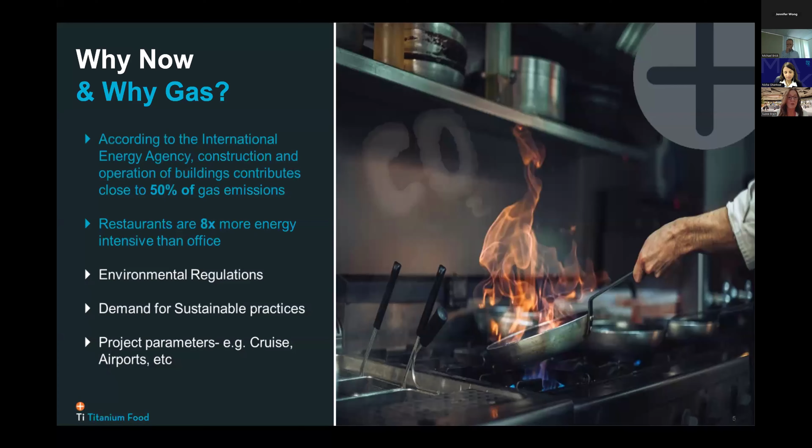But is it a good thing to say goodbye to gas? Well, a typical cafe that moves from being a mix of gas and electric to going all electric, your contribution to the planet is going to be equal to taking about 2 cars per cafe off the road per year. But beyond that, there's also a whole host of other benefits, both for you and the planet, your consumers and the staff. And I'm going to talk you through where we're seeing those benefits coming through and some of the data that's emerging that is indicating that gas also can have some unhealthy side effects too.

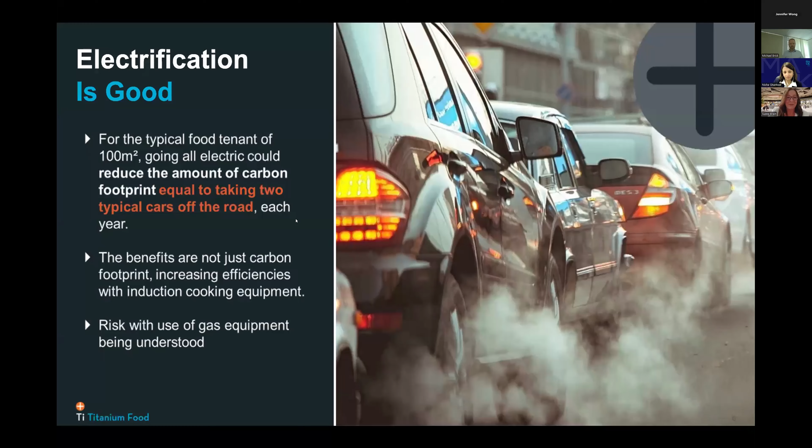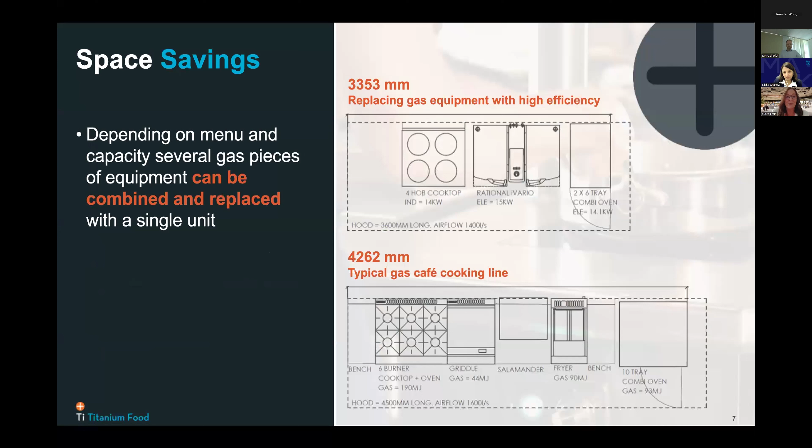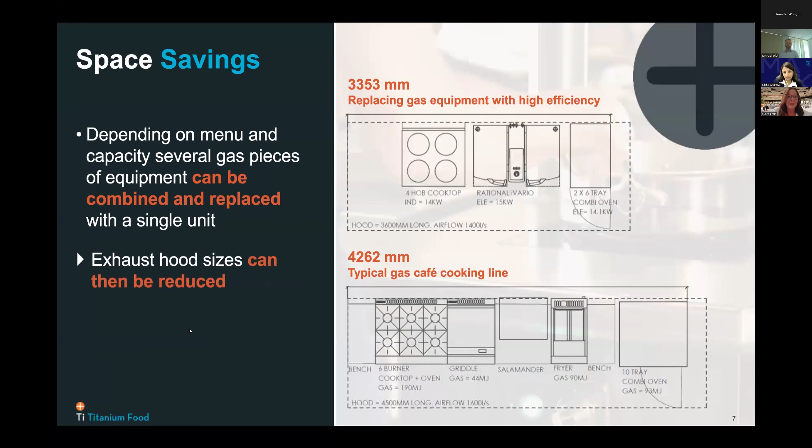So one of the things that we are finding is there's some good space-saving efficiencies that can be done from moving to an all-electric kitchen with the right menu and the right infrastructure in place in existing buildings. When we swap kitchens over to all-electric, we can combine multiple pieces of equipment, reducing the hoods and reducing the extraction requirements. And that also frees up additional bench space within tenancies too. So there's quite a bit of reconfiguration opportunities that are good.

We're also finding that there are certainly some great benefits for employees. The reduction in heat in the kitchen, the reduction in noise from not having to have the hood on all the time is certainly helping with some of the mental health goals and challenges that affect the sector as a whole.

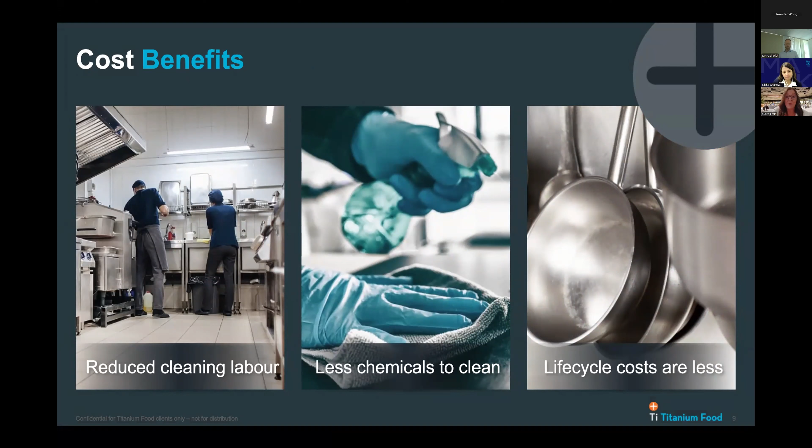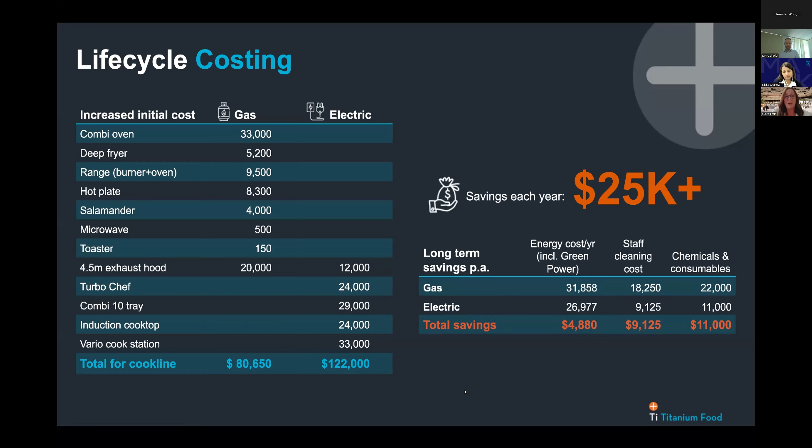And then we have been able to calculate the cost benefits. So we do find a reduction in the amount of labour required to clean the kitchens when it moves to an all-electric kitchen, far less chemical use, and the overall life cycle costing across the term of the lease is lower. And just to give you a sense and flavour for that, while the upfront cost of electrification can be around 50% more expensive than if you're fitting out a typical kitchen, when we actually calculate the life cycle costs of the energy, the staff cleaning, and the reduction in the amount of chemicals, there can be, on a typical cafe-sized tenancy, around $25,000 a year in savings.

And then just wrapping up my section, there are other benefits that are coming through too. So no gas means we have reduced fire hazards, we have lower risks of gas leaks, we have one less services consultant to deal with in new buildings and one less set of authorities to need to go through. And it also takes a load off the air conditioning through the reduced need for heat extraction and spill into the kitchens.

So that's all the good stuff, but I know that many of you naysayers might be there with burning ideas of why it's not going to work. So let's hand over to Nisha and hear about how to overcome some of those.

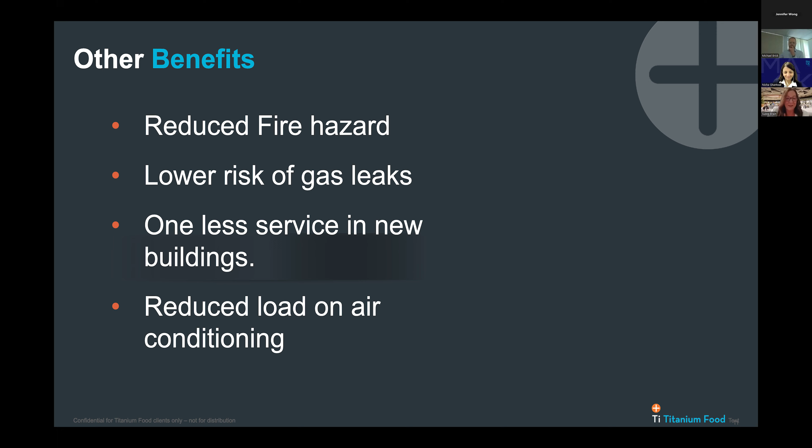It's very exciting to be sharing our experience and learning from this journey of electrification. Now that Suzee's covered why the industry is moving towards electric commercial kitchens, I will be mainly talking about the how and the what's. So how do we electrify the kitchen?

In terms of electric kitchens, we've been working on new builds as well as electrifying existing kitchens. When we work on new builds or new kitchens, it's relatively easier because we're working with the design team from the beginning who are putting in the electrical infrastructure. With the new building, we've got the services engineers in place.

And if we are early on in the project, we do get an opportunity to inform the project team on what the electrical capacity requirement is. That helps put all the infrastructure in place for the new kitchens to work, and also allow some contingencies in case the business goes well and they want to increase the electrical capacity or the cooking capacity of that particular kitchen.

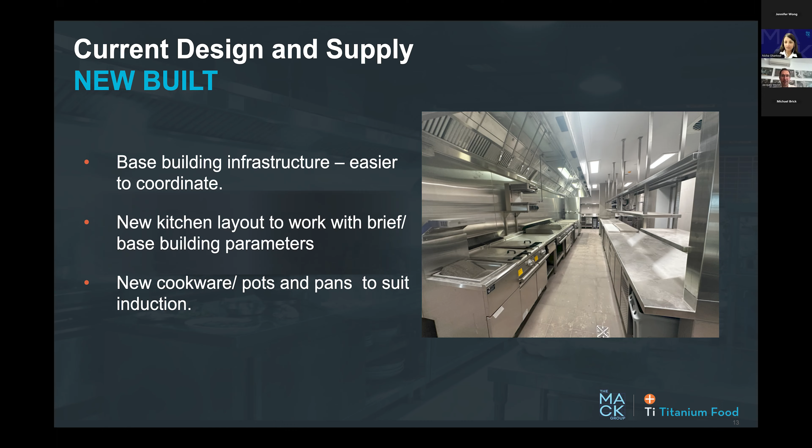We worked on a fairly large number of new build kitchens which are all electric. Recently, Parramatta Square was one of the award-winning projects in which we had all electric kitchens. BEST at Blacktown, the Blacktown Exercise, Sports and Technology Hub: we had a really large kitchen which supported the cafe as well as the function. You can see the image on the right.

This kitchen had all electric equipment, and the operators were very open to having an all electric kitchen and working with that. We visited the kitchen after it opened, and they had all good things to say about how everything was working. This was one of the projects where we were involved right at the concept design stage, so we were able to inform the capacity requirement, and that was all provided.

In addition to that, we are currently working on a large number of projects which are all electric, from Cutaway in Barangaroo, Qantas lounges, school projects, Woolworths Distribution Centre, and a large number of those.

We also work on electrification of existing kitchens, which obviously comes with a lot of challenges, mainly that when we walk in, there's already some infrastructure in place. So when we walk into a project knowing that we're electrifying, we like to understand the menu requirement, the capacity that goes with it, how the kitchen operates and how we can improve the overall efficiency. Then we analyze if like-for-like replacement from gas to electric is what we want, or whether we review the menu and cooking equipment and introduce new technology.

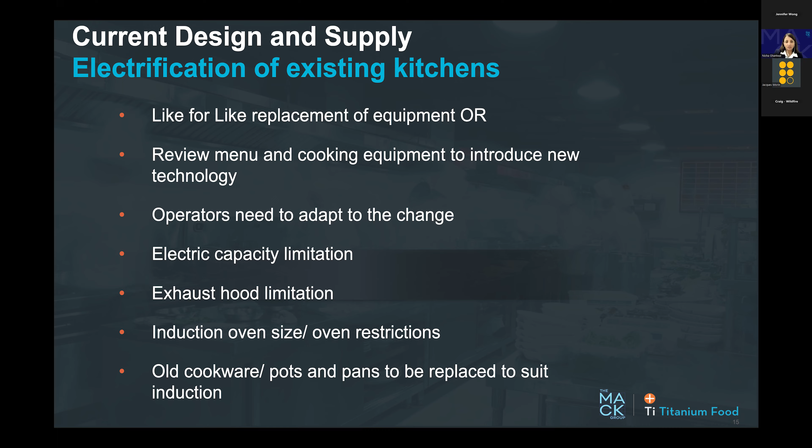So understanding if the oven under the cooktop, which was being used previously, is just being used for holding plates, or is it actually being used? With combi ovens being available in many kitchens now, those underbench ovens are usually not that much used for cooking. So just understanding the use of equipment and then providing that input, and also making them aware of the change of cookware to pots and pans which are suitable for induction. So all of this education and working together with the operators becomes quite important when we are working on electrification.

Now, with electrification, we are currently working on the Sydney Opera House Green Room Kitchen, and also informing them on electrification of other facilities on their campus. Also, UNSW, we have recently completed electrification of many of their kitchens and laundries, and they have a bigger target of electrifying all their campuses. So we are sort of assisting with that as well.

With corporate banks, we're working with Commonwealth Bank and Macquarie Bank on electrification of their facilities as well as all-electric new kitchens in their facilities. And also Google is one of our important clients who have looked at electrifying all their facilities, and we're working on their offices in Sydney.

And also with councils, we do work. So with North Sydney Council, we've been working and advising them. We've sort of done the education part with doing talks to the food and beverage tenancies in there and the users, the operators. And we've also assisted with some of their tenants coming forward, wanting to understand how they can go about electrifying their facilities. We work with them in providing them reports on various ways, like replacement or changing, or what does it mean to have a holistic approach to electrification and sustainability. So these are the projects that we've worked on.

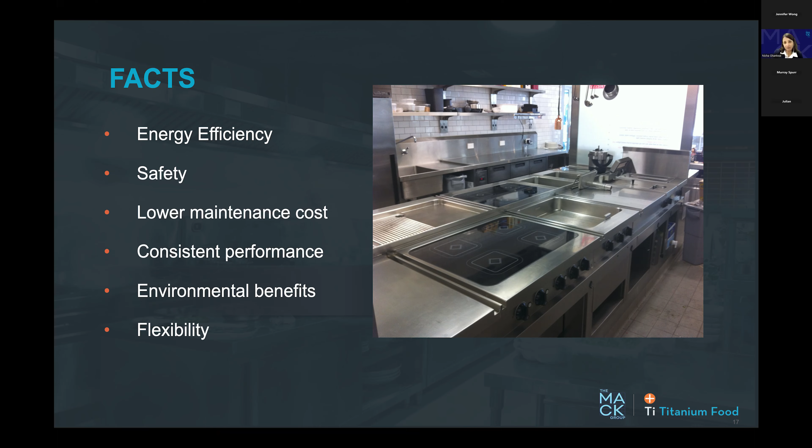Lower maintenance cost. They have a consistency in performance, and also the environmental benefits, and also flexibility offered by many of the electrical equipment and how they can use, for example, the speed ovens or the pressure bratt pans and things like that. So there's a lot of benefits which previously were doubtful, but now they are facts which everyone's aware about. But there are still some fallacies and some myths that need to be busted in relation to electric cooking, that we have limited cooking techniques, or there's limitation on how we can do char grilling or Asian cooking.

So we've been working together with a lot of equipment suppliers. Many of you are present in this room. So we've been working together with you on understanding how technology can help. Some of you are R&D-ing equipment with that, and also working with the end users to develop the technology further. So, equipment suppliers like BNS, Moffat, Phoenix, Stoddart, they keep us abreast with the technology that's available, that is being developed in the electrical equipment sector. So we keep ourselves informed. Also, we've been keeping ourselves up to date with research happening in the industry.

For example, the Microsoft office in the US converted to an all-electric kitchen, and they did taste tests on Asian cooking equipment, using an induction wok in a blind taste test, and they have provided reports saying there was hardly any difference in taste. So things like that, we keep ourselves up to date with what's happening around the world as well, to keep ourselves informed.

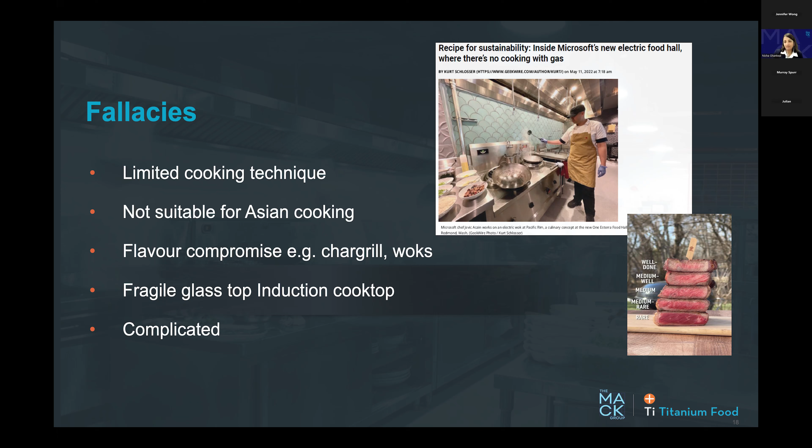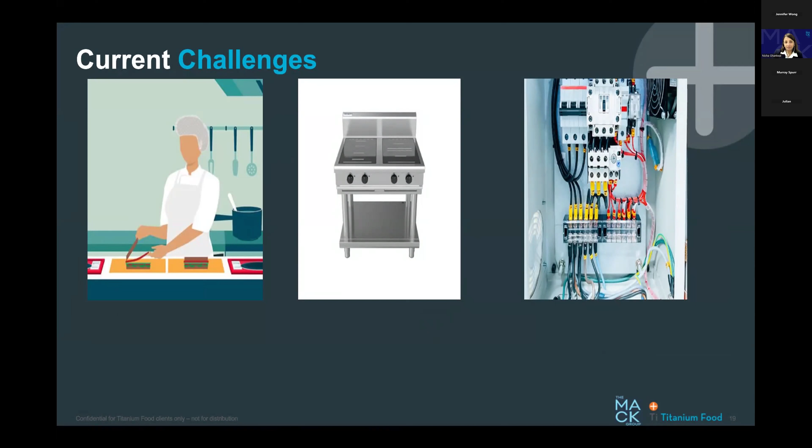But there's still a lot of challenges, mainly from the designer's perspective. When we go into the industry and look at the electrification requirement, what we see is staff training and people being aware. Training is still a big part, understanding what the potential of the gas or electric equipment would be, how to utilize the full potential of the electric equipment. Training in the right direction is really important to make the most of that energy efficient equipment.

The big concern is the initial capex, or the capital cost. Many of the induction equipment, as well as speed ovens or energy efficient electric equipment, are at higher cost, which results in higher initial investment. There is a long-term benefit, yes, but many times you have one party developing and investing in the equipment and the operators coming in to use it. In those cases that becomes challenging. The project budget is always small, and sometimes we have to look at options, and that could compromise the main intent of electrification.

And lastly, the biggest concern is the supply, the infrastructure not being available for all-electric kitchens. Many buildings, as soon as they hear all-electric kitchens, know it requires a lot of power. All the equipment is three-phase, with large kilowatt ratings and amperage, and especially with existing buildings being electrified, that becomes quite a big challenge.

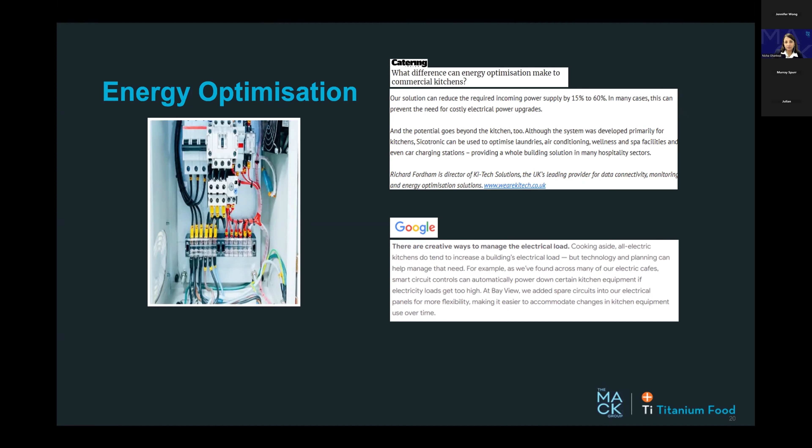So we've been looking at what is being done in other parts of the world. In some places, energy optimization technology is installed which distributes the power where it's required. In that sense, the electrical capacity required for the kitchen can be reduced, and the electrical energy used in the kitchen is used in the most efficient way, because sustainability starts with the first step, which is reduce. So providing more power may not be the answer; the optimal use of that power needs to be the approach. That is why we would like to work with the design team, the mechanical team, and the industry to understand how this can be applied on projects so it becomes more viable in terms of cost as well as energy.

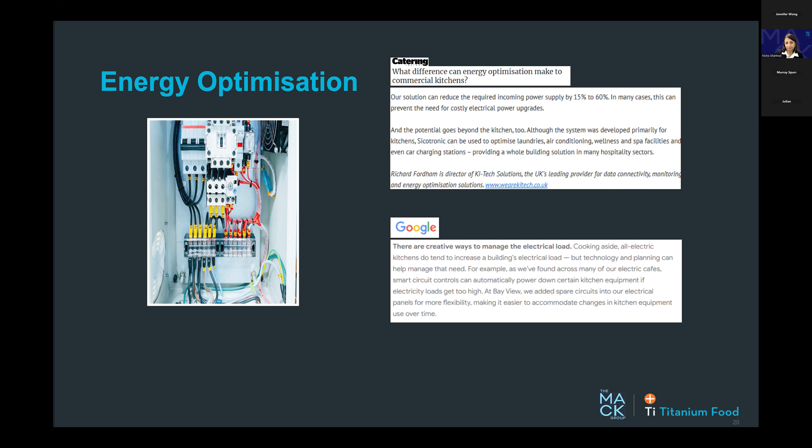Also, from the electrification perspective, the main intent of electrification is sustainability. When we're looking at sustainability, going to renewable energy and electric is just one part of it. A holistic approach is really important. Eco-friendly, energy efficient refrigeration such as GEMS rating, efficient equipment like fryers that use less oil, possibly induction fryers, high-speed ovens, pressure cooking, all these together can provide a more efficient option in terms of equipment. As well as in terms of operations, looking at ways to cut down energy use, possibly turning off equipment when it's not used.

Equipment that have sleep mode could be used. Off-time cooking, for example, slow cooking overnight, and using those options so that the energy can be distributed and less energy or supply can be used for a particular kitchen. And then also looking at cutting down the waste, monitoring the waste, and designing less for hoarding.

For example, on certain projects, but mainly in dining halls where you have people helping themselves to food, we've seen trays result in a lot of hoarding. People take a lot more if they have trays, but instead, if they have plates, there's less food wastage, as well as in terms of washing up, there's one less tray required per person. So it results in using less water, less chemicals in terms of washing as well, bringing down the overall cost and energy usage as well.

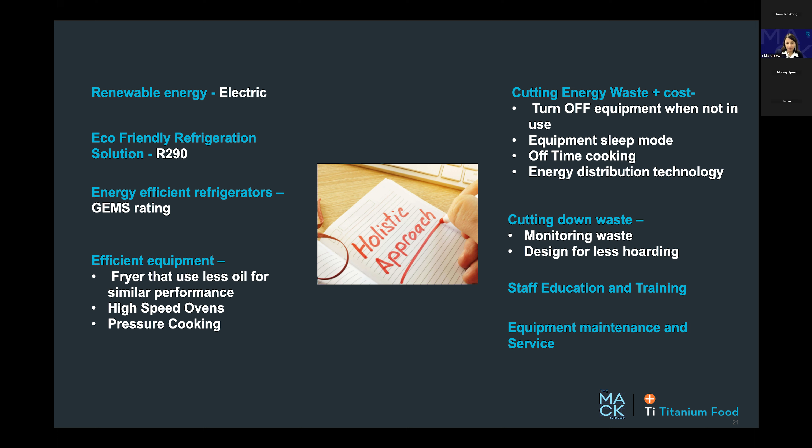So just looking at opportunities like that in projects, staff education and training, of course. And then also it's very important to maintain the equipment and service them regularly to make the most out of the equipment.

Just touching a little bit on the future trends, we are seeing more and more governments, state governments moving towards electrification and providing that information on their website and legislating all electric new buildings and keeping the gas out. So we've seen that in Canberra, we're seeing that in Victoria, so we're seeing that in a lot of government. We're seeing local councils, like North Sydney Council, some of the councils being leaders in making their first steps towards all electric kitchens and electrifying new projects.

There's also advancement in technology. Every day we are hearing more and more about what's happening in terms of electrification and better equipment, more energy efficient equipment that use less water, equipment that can provide versatile cooking options. So that's really important in terms of electrification as well, so we can provide those options to our client.

Also, what is important is government incentives. Recently, Canberra announced the rebate for commercial kitchen electrification, which is fantastic because, like we mentioned, the cost of equipment as well as the cost of having the capacity of electric equipment installed is a big capital cost to developers as well as operators if they're fitting out the kitchen themselves. So it's really important for the government not only to legislate, but also to support the switch from gas to electric.

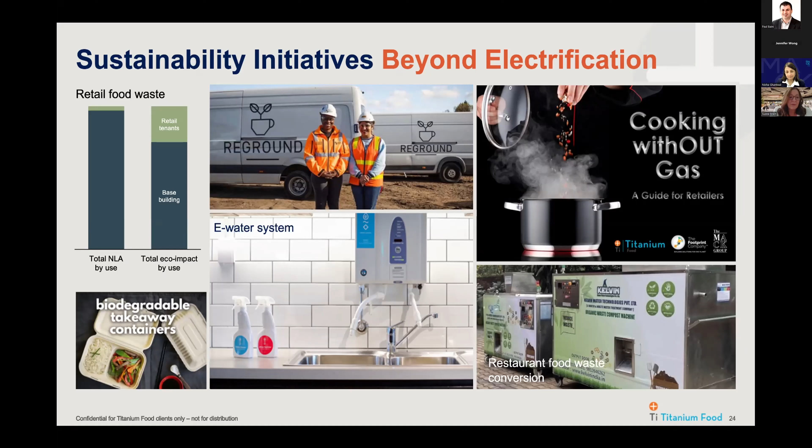Nisha, could you just take my slides forward for me, please?

I'll get you to keep being my slide girl, please, Nisha.

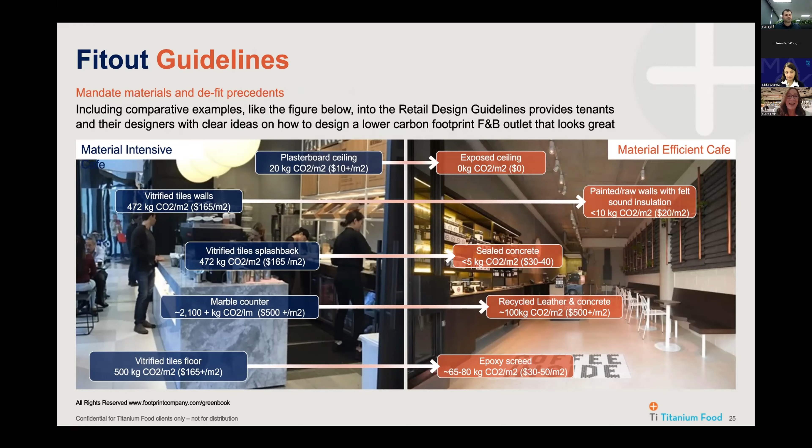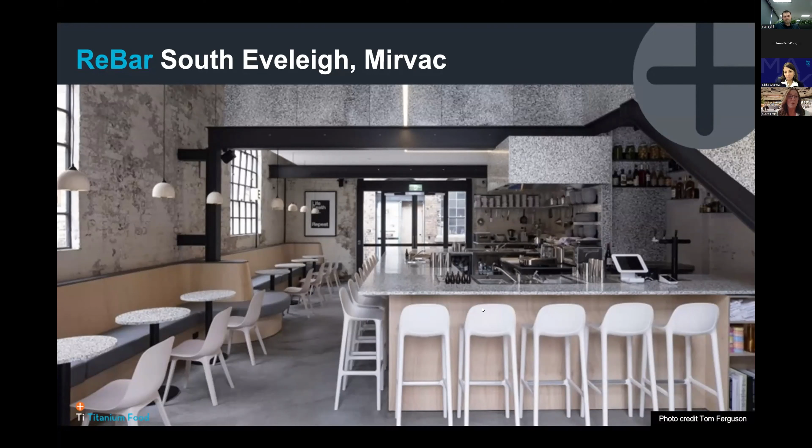This is a good example of the materials that are now available for hospitality fit out. So this is Rebar at the South Eveleigh development done by Mirvac and Sunland Group. And so most of the materials here are all recycled. So we've got pineapple leaf material that forms all the covering materials on the soft furnishings. There's compressed mushroom material that's making up some of the lighting and some of the moulded furniture, and recycled milk bottles that form all the tile work that you can see. So plenty of things emerging there.

In terms of waste, about 15% of all the food waste that ends up in our landfill comes out of the restaurant sector at the moment. Some early costings are indicating that for about every dollar that operators invest into improved waste processing systems, equipment, etc., they're saving about $7 in operating costs.

And so for a recent webinar that we did for World Waste Reduction Day, I came up with a bit of an acronym that I think will appear on the next slide on what other ways we can reduce the food waste. So reduction was the name of the game. So as Nisha said, reducing plate sizes, particularly on buffet and share plates, and we're finding this in mining camps and universities, colleges, those sorts of things. Reducing the plate sizes, reducing the trays, etc., does have significant impact on reducing the waste, encouraging customers to take their leftovers home. D is for donating leftover food to charities. I think many people are aware of those sorts of services that are around now.

Utilising more of the food parts. We've got a great plethora of up-and-coming young chefs who are really working on that sort of whole of plant, whole of animal type of approach to reducing waste. Composting, a very effective way of working on the waste reduction. Try your hand at some pickles and ferments. You can also look into your inventory management and trying to reduce waste at the use by date end of things. Offering choices for customers to allow them to not leave as much food on their plates.

That also helps with cost of living pressures that are limiting customers engaging in restaurants at the moment, and noting the sort of leftovers that you get and then maybe rejigging your menu and your recipes to adjust to that to reduce the waste.